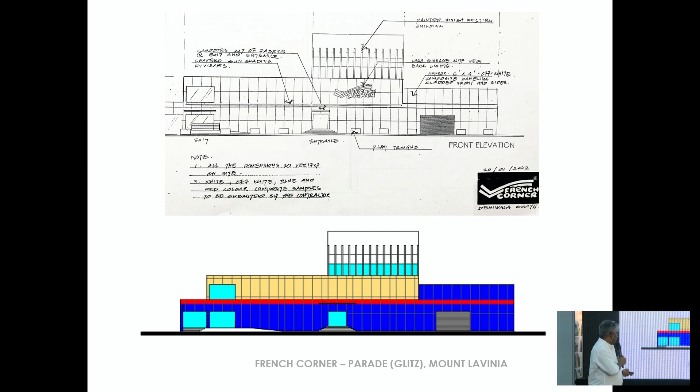Well, this was not only architectural but a very technical project, because it was an 8,000 square feet retail store, but they wanted flexibility in the interior to showcase different products at different times of the year, changing depending on the arrival of their goods.

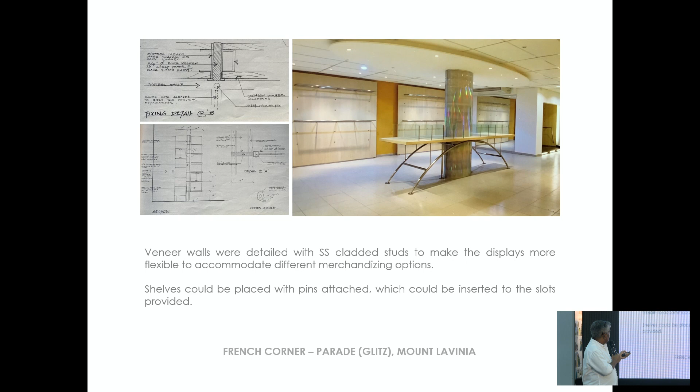So what we did, as you can see on the left hand side, was develop certain details flexible enough to be changeable to display the merchandise. We first developed veneer walls detailed with stainless steel slots which can take shelves, with pins attached, and that's a variation of it.

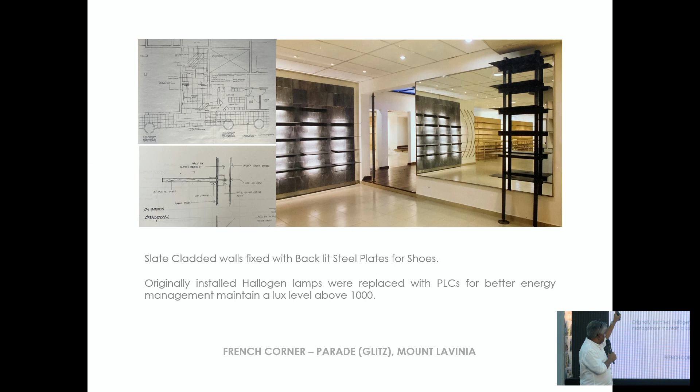As you can see here, these are all backlit, slate-cladded walls with steel plates and all that. This pocket is for shoes and other accessories.

And then, like the previous architect, Shashikala, explained, we had a concern about lighting as well here. We were trying to maintain a lux level of about 1,000 minimum, and the only options we had at that time were CFLs, halogens, and metal halides. But to keep the correct lighting color temperature, we had to stick to metal halides and halogens.

Then again, after about a month or so, we experienced a heavy electricity bill coming, so we had to settle for different light fittings. At that time there were PLCs, which is a developed version of a CFL, so for this project we used a lot of PLCs only.

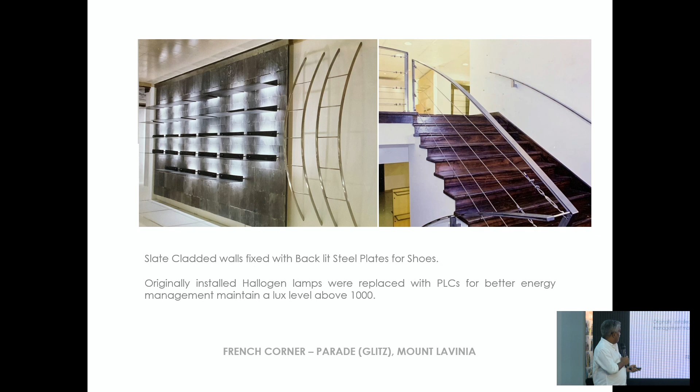All these photographs don't have any merchandise with them, because at that time we didn't have the technology for digital photography and all of that was not available. So we just took photographs as and when the project was happening, and this is what we have right now.

But all in all, this was a very successful project at that time. This was the 6th addition to a chain of retail outlets for a client, and it became a thumping success for them, eventually becoming the biggest retail mall chain in Sri Lanka.

Well, I'm just trying to explain the differences between that project and another project right now, because even Palpatha Eco Safari Lodge is also no more there.

This we started doing in 2011, and this was a very simple project. We were given a site next to Vilpatthu range, and it didn't have any buildings around it. It was abandoned cultivation land attached to very rough kind of landscaping. Then the client told me he needs to develop this project into a camping site.

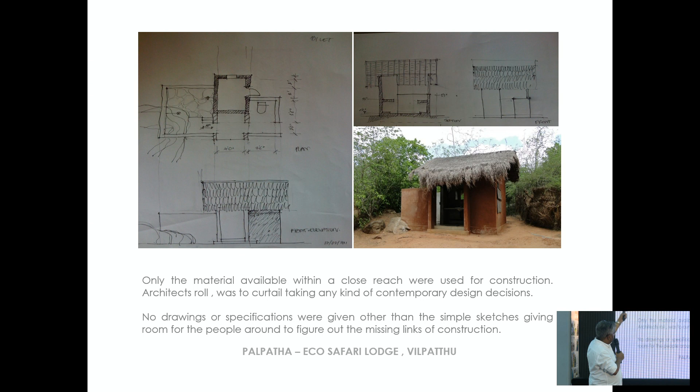This is one example of how we developed it. We did not give them any drawings, but we gave them sketches. The sketch on this side is the elevation of this particular small building, showing how to capture a small area of rock formation in a corner under a tree. This was developed into a common washroom facility.

After a while, like about a year or so, the place started getting settled with overhanging tree canopies covering the construction.

The connection between the units mostly happened on street paths, small footpaths. But there was a small area in this land prone to flooding, next to Malwathu Oya—a kind of small, ditched area. The small area you see here is the Malwathu Oya branch, and this was a lowland area, so over that we had to put up small bridges.

Some units had washrooms attached to them. This is what you see on the right hand side—a unit that had a washroom attached.

When it comes to detailing, we weren't that particular about making details prominent, but most of these details you see here, other than the small sketch, were only to give standards—like when they were putting up a bench, we had to give them standards of sitting and the levels. Other than that, most of these elements on your right hand side—the cloth hanger, the shower coming down from up, and so on—were developed together with the people who were constructing this.

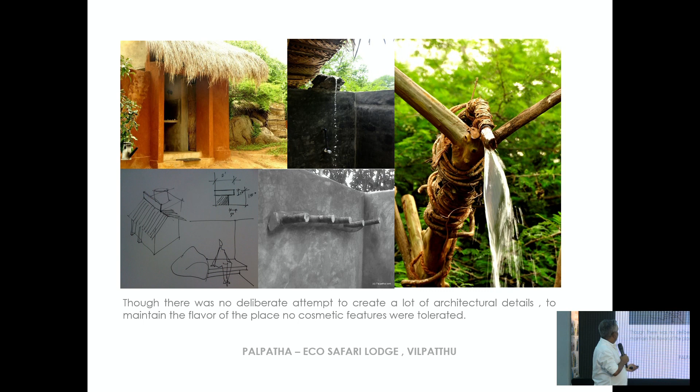This particular project won the certificate for carbon neutral hotel, and was certified as a biodiversity conscious hotel, before it was sold to a different party.

Getting back to another retail experience—this is more than designing an interior. Again, this was for the same client that I did a presentation on for the previous project.

This is the brand Glitz. Glitz was started as a brand with a little bit of research. This particular client was doing good research all the time. He came up with an idea: why not have a different kind of series of retail malls for clients who are emerging as brand conscious—not the super brands like Giorgio Armani or Dolce Gabbana, but brand names for people who are conscious of conforming to standards maintained and so on. For that kind of clientele, that market segment, they were planning to start a new range of shops.

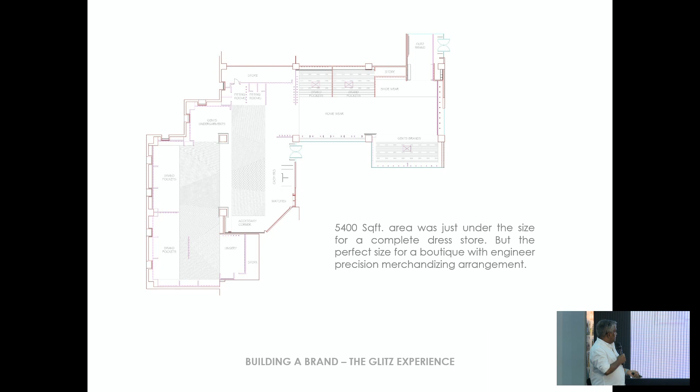basically a kind of precision engineering in merchandising, right? You have to always be conscious about what you display, the amount of products you display, and how you display it. That has to be done in consultation with the experts.

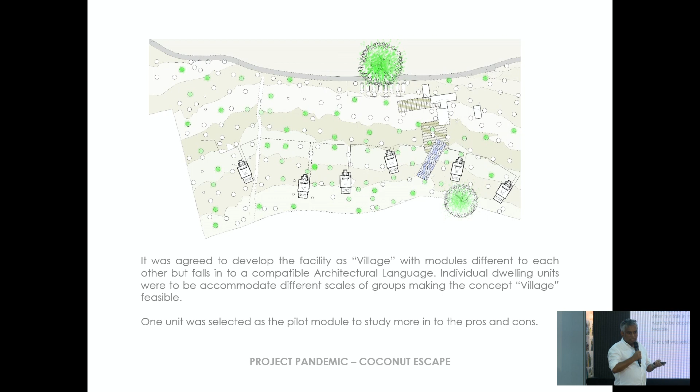So the module we selected is the small one—the third unit that you see there—a simple structure, a simple A-frame. This particular unit had 2 levels, planned to accommodate one single family of about 4 to 5 people.

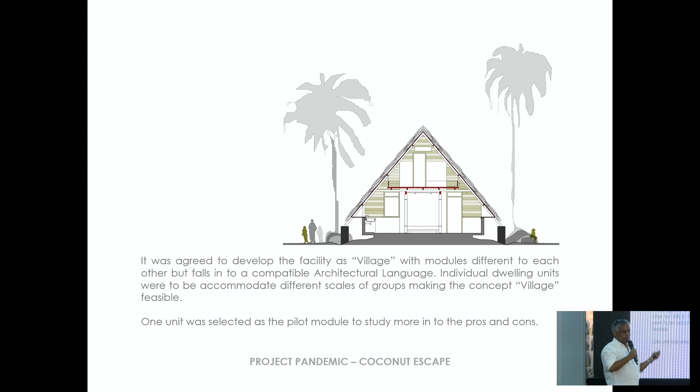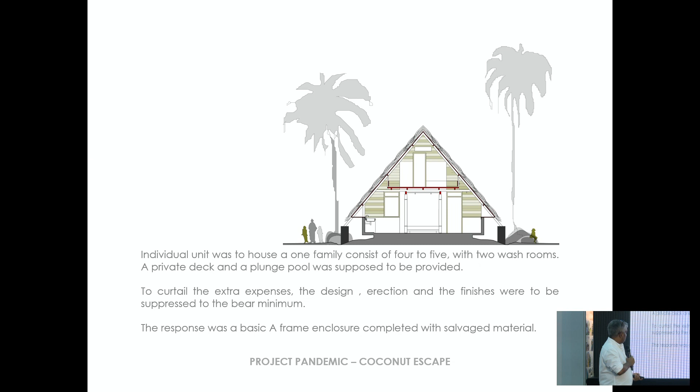And since we were facing the pandemic, and facing the issue of spending on a project we didn't know whether we could complete, we finally decided to stick to salvage material and do it as cost-effectively as possible. That's how we started it.

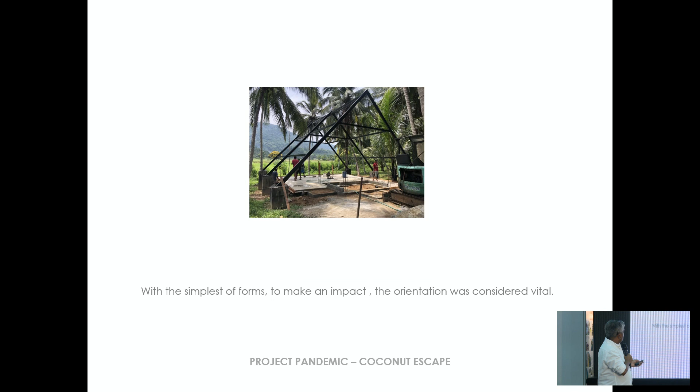The first step was to get the best orientation. This particular direction was decided based upon the views that we have. And this was the structure, and this is the final completed version—not the landscaping, which is yet to fill in this area.

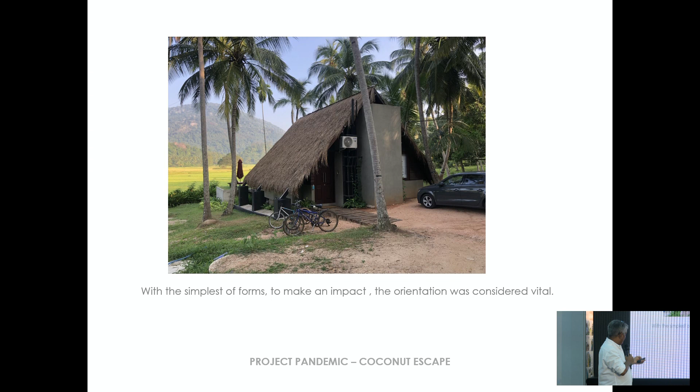Well, this was completed with a small plunge pool and all that. As you can see, we used only salvage material for building finishes. But the interior is very simple—this is the upper level, this is the lower level, and the connection in between, with 2 washrooms, simple.

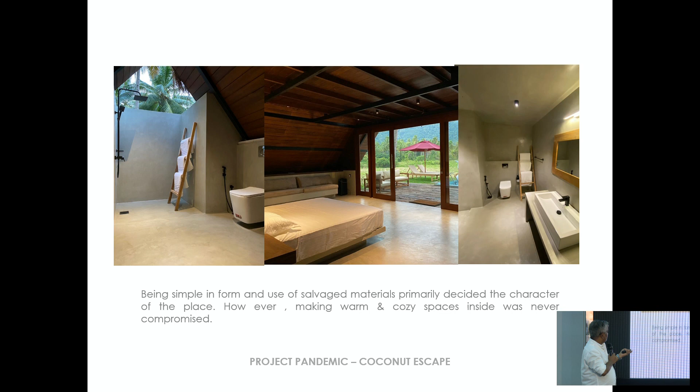So that was the project we handled during the pandemic, and it rewarded us with good results. That's why, when you're given a different situation or a different challenge, you have to take it not as a challenge but as an opportunity.